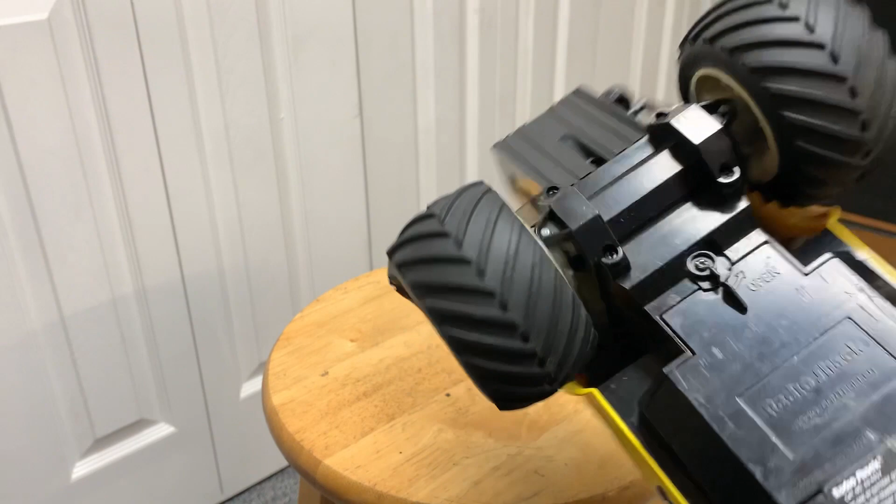So I got this off-roader off eBay, and it was cheap because the tires are wrecked. They're all wrecked. A couple of the rims have got some pretty good cracks in them too. This tire is really bad. The back ones aren't as bad, but they're still... I have the other one that I got had flat spots probably about that bad, and I've almost got them out with foam, and I put foams inside the tires. Anyways, these tires are hard to find without buying whole trucks.

So what I'm going to do with this one is try and figure out a way to get some of the Amazon alloys on there. They're almost about the same size as the next version of this truck which had the larger diameter wheels. I think the outer diameter is the same as what the inner is on these ones. So these will be a little bit narrower, and I'm going to try and put some more modern tires on it, see if it works out, and see if it's any better off-road. I would just suspect that it would be.

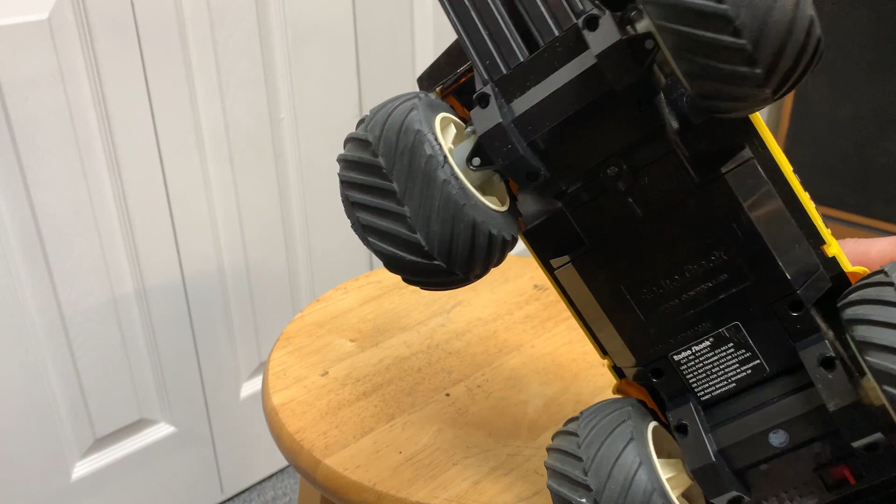So first things first, I'm going to take the axles out, take the portal covers off, and then head out to the shop and bang these things apart. I'm pretty sure this hex is just pressed onto the shaft, and I think this is the same. I see that a lot with these toy RC cars, so I'm going to go rip it apart.

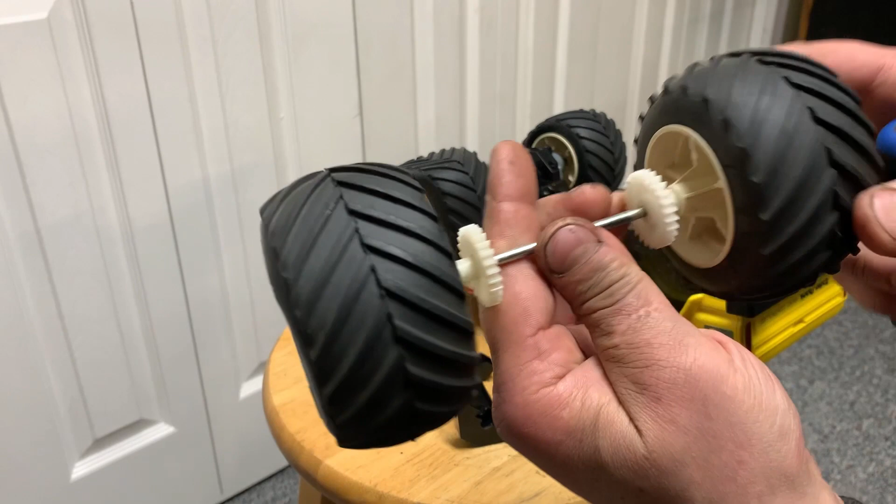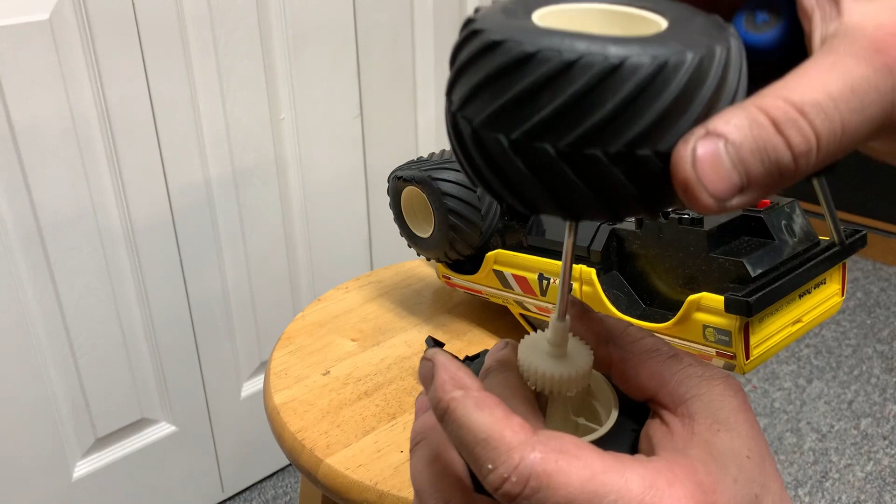You can see the portal drives. The gears actually look like they're in really good shape, actually. A little bit of grease on there still. So I'm pretty sure that this little collar is just press fit on there, so I can just put that in the vise, tap that out, pull these off, and then I can do some measuring and see what we need to do. It looks like we got a hex here on the ends of these, so maybe a 4mm shaft. So we'll go knock that apart and see what we can do with that.

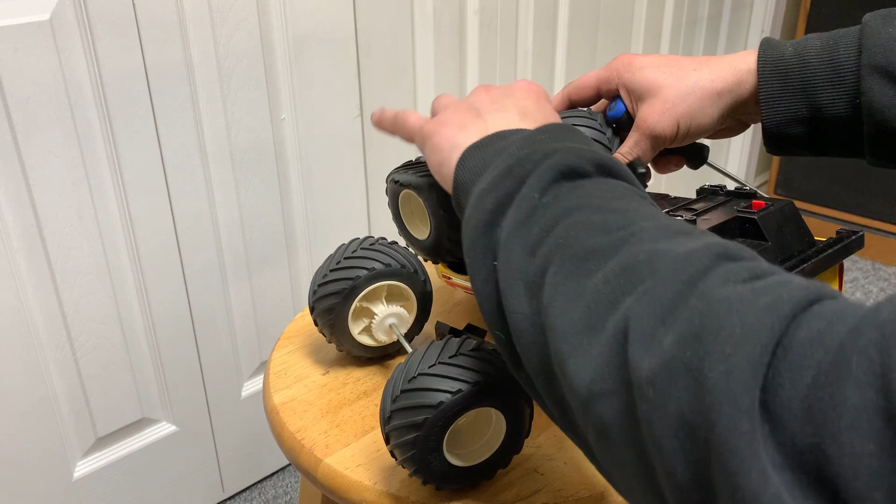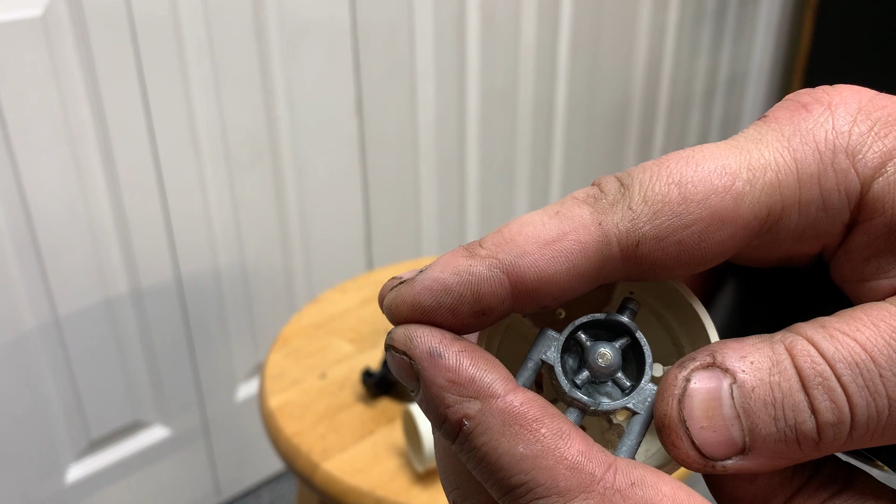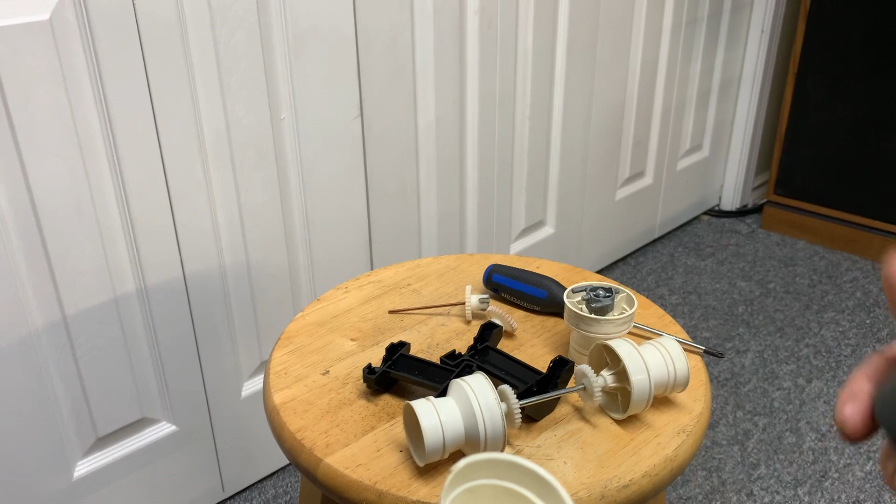And then the fronts, same idea, except it's just the hubs. So you can see this is the front hub, and that little hex is just pressed on there. And it looks like the drive coupling here is also just pressed on. I'm going to try and support it as much as I can on this lip, and then go in there with a small 3mm punch, or even smaller than that, and tap that out without breaking anything, hopefully, and then adapt these on there. I'll probably try to get these centered, so the back spacing's gonna be something to figure out.

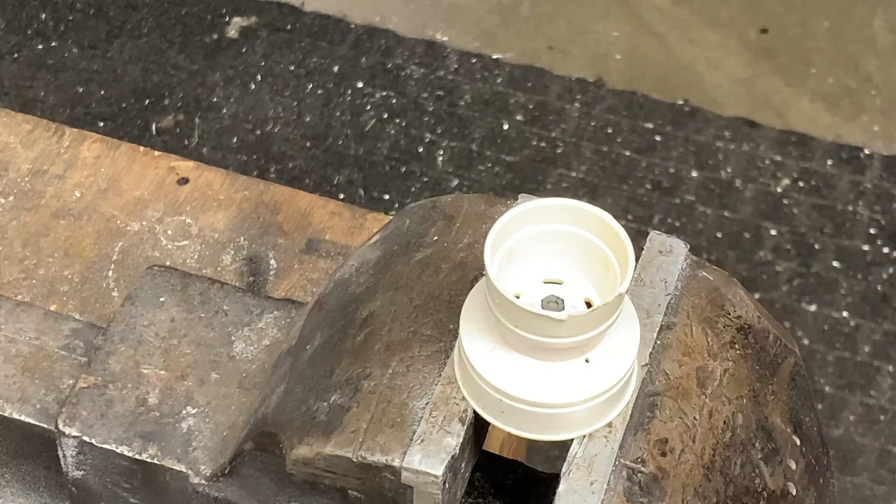All right, so I got it supported in there half decent. I'm going to go in here with a 3/32 punch and be very gently just tap it. Yep, came out. It's actually very solid feeling plastic. So there's what you're left with - you got that little hex nut that you always looked at and went, what did they do there? So that's what they did, it's just pressed in there. That's actually a really nice little chrome shaft. So do the next one without breaking it, hopefully.

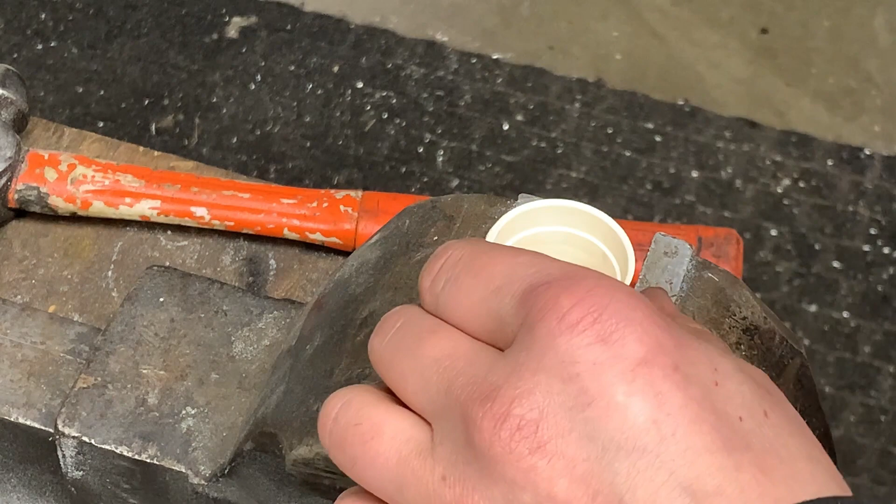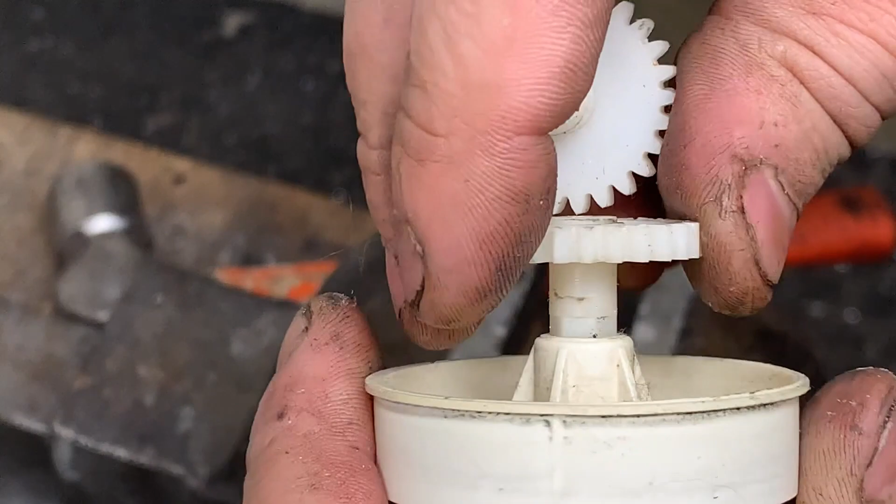These are pretty delicate. If you squeeze that too tight in the vise, that's gonna break for sure, so I don't even tighten her up. So the rear, I'm just gonna hit it against the wheel too. I could have held it in here a different way probably, but the front came apart pretty good. So, oh, that was not - I felt like it was barely even on there. So you got your little hex drive gears, probably about a 4mm shaft, I'm thinking. And then these hubs just have a hex in there, I don't know what size it is, maybe 7 or 8mm. Pretty tight fit too. Okay, now we gotta go devise a system

To make those new wheels work, let's see what we can do. So we got the first version of the front hub adapters printing here.

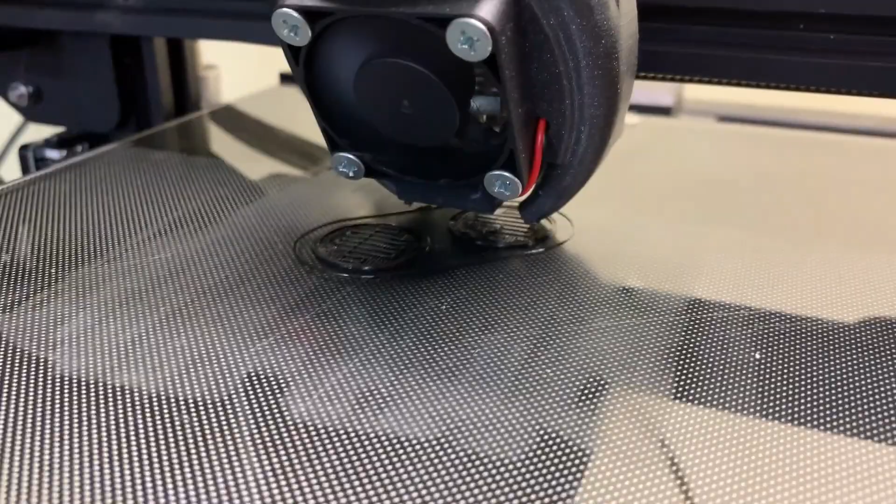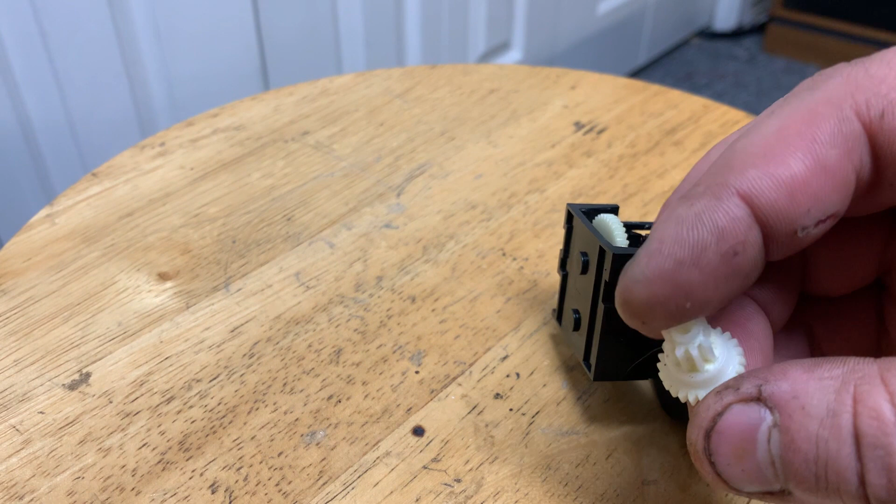See how they turn out. So while I had the transmission apart, I noticed that the pinion gear is missing a tooth.

I was kind of rolling over the wheels while fitting hubs and stuff like that, and it felt kind of funny. So I ended up 3D printing one with a 0.2mm nozzle, on a super detail setting, printed vertical like that.

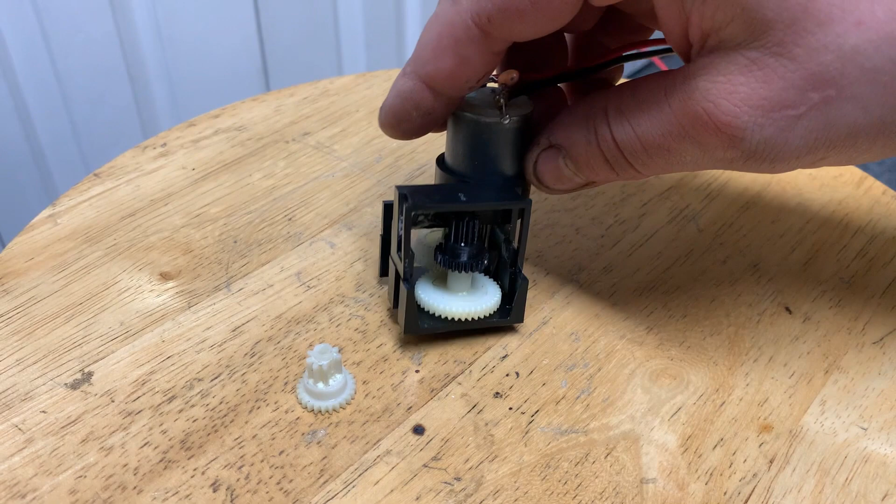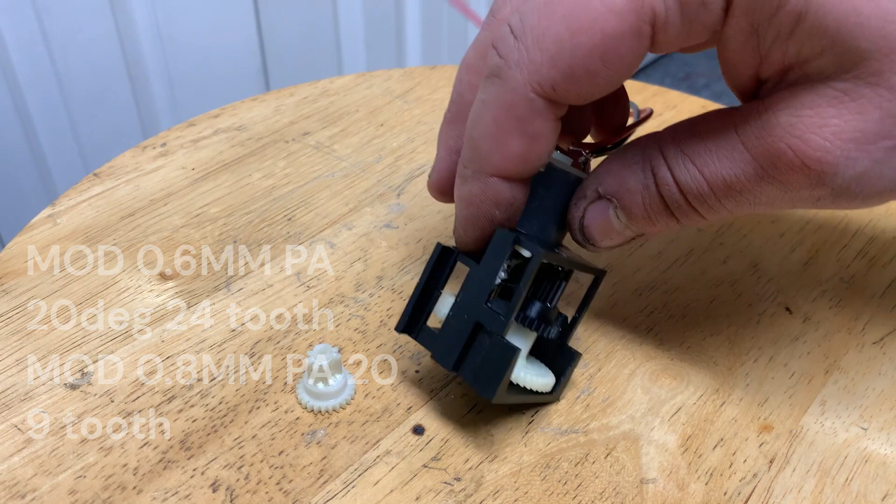So that's the black gear. I think it was a 0.6 module on this one, 24 teeth, and 9 teeth at a 0.8 module, I think. I can't remember, it was 15 minutes ago.

So anyways, I'm gonna try it, see how it is. If it breaks right away or whatever, then I just won't worry about it. I'll find another transmission or whatever, but I need to start printing in nylon is what I need to do.

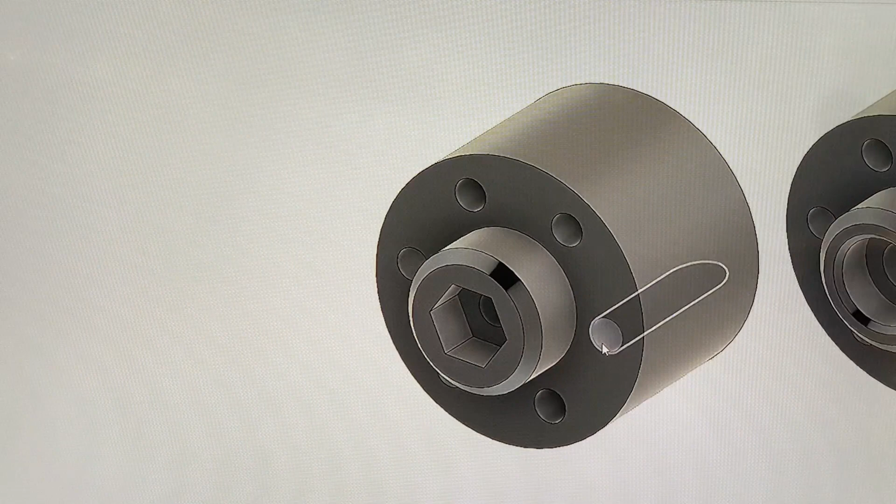Okay, so here's the two hubs. This is kind of the final version that I ended up using. So these ones here are the front. The axle here actually just presses through this hole with a tight fit, and then on this side you've got the 6mm hex that you press in, which is in the factory wheel. So these basically get installed on the truck exactly as the factory wheels would have.

And then your Amazon alloy 6-bolt, 17.5mm bolt circle, M3 bolt pattern will bolt in, so you can actually put quite long M3 screws in here. I only have the stock ones, but you could put like a 10mm long, or even longer, maybe a 12 or 14mm long M3 fastener in there, and that'll hold the wheels on.

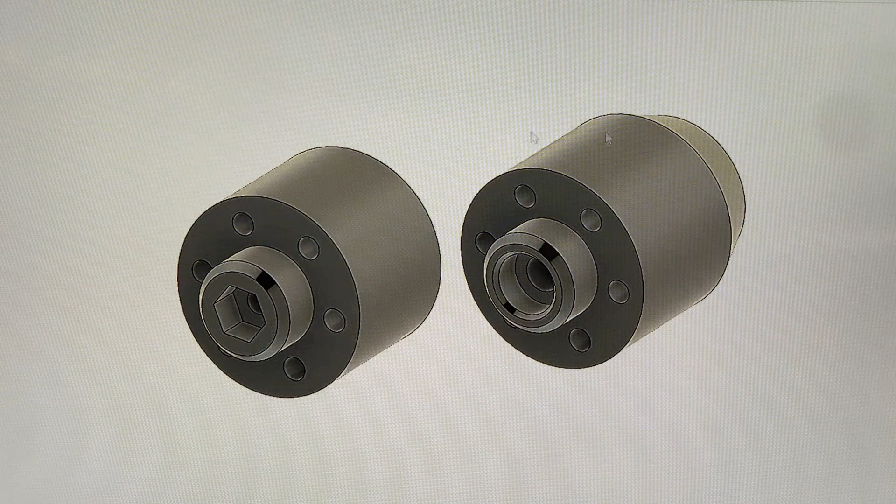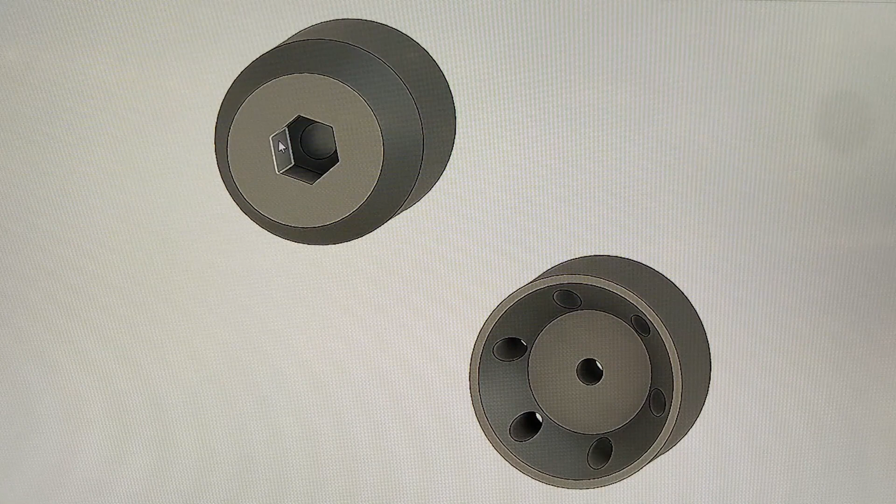And then the rear, the 4mm axle actually floats in this. It could be snug, but your differential action will start to suffer. So the nylon gear drives in this hex here, and then your hub just floats on the axle, so it spins freely in there.

And that's them. So now I'm going to go and print them, bolt them on the truck, and then bolt the wheels on. I'm going to skip the installation of them because it's basically the reverse of taking them apart, and we already did that. So I'll just skip right to the truck done.

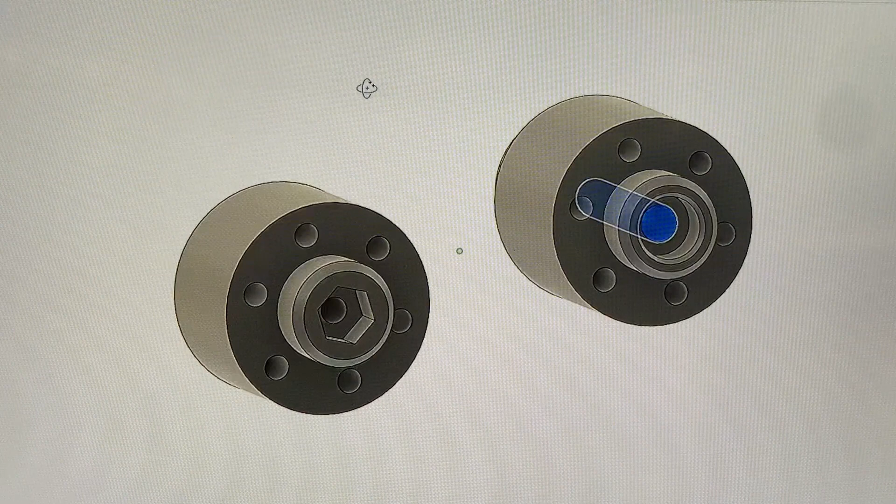And that truck is also getting the full ESC swap that I did in the previous video. So I'm not going to show that either because we already did one of those.

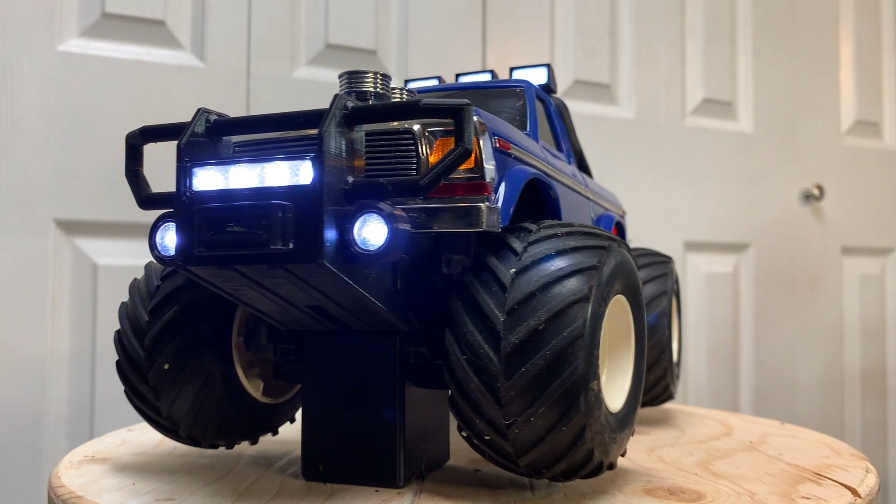So before I show you the result of the tire installation, I wanted to show the new front bumper that I've designed for the off-roader. It's got a light bar integral, and it's also got the original fog light locations fitted with LED lights.

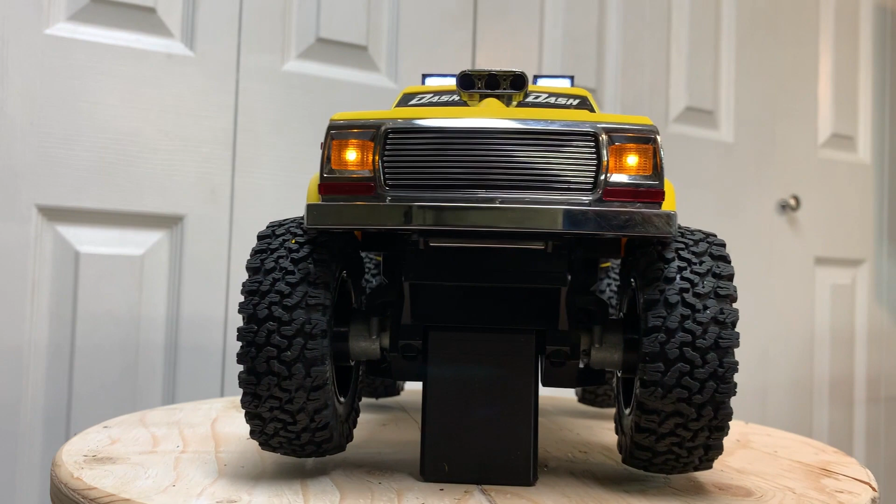So here's the end result of swapping the more modern Amazon alloys and 33 by 90mm tires on there. So these were like $20 tires. Took a few days to get. The wheels were like the next day.

So it did basically triple the cost of the truck, but the truck would have otherwise been a scrap pile, and it's a totally good truck, other than I did have to fix that pinion. The 3D printed pinion seems to be working great so far. I don't know how long it's going to last, but we'll run it because we had no other options. So this truck would have been parts bin, and now it's pretty cool.

So I did do an XL5 swap on it. It has a Traxxas receiver in it, so it's 2.4 gigahertz. Runs on the little 2S LiPo, same thing, 750 milliamp. Works great. This truck does have the 3D printed roll bar without the crossbars, and the LED lights.

So if you want to try and save these trucks when they've got tires that are, you know, like this, too far gone, this is a good option.

So in the next video, I think we'll take this truck and put it up against the all-original off-roader, one ESC swap with original tires, and then this one, which is ESC swapped and aftermarket tires, and just see which one does the best. I'm thinking it's going to be this one, but we will see.